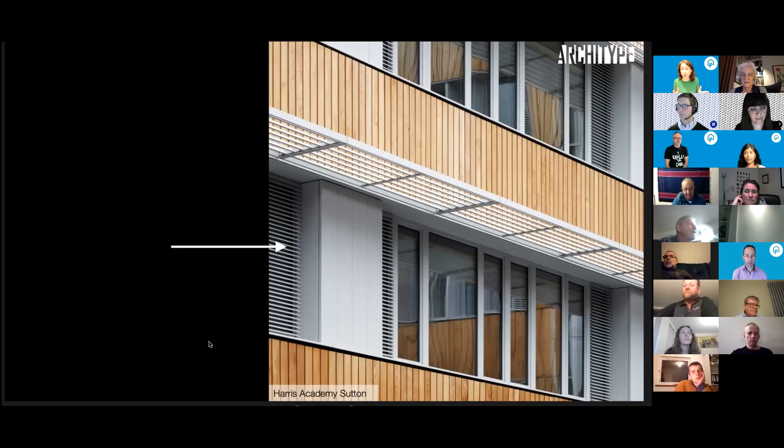It's useful to leave those windows open at night when the temperatures are cooler outside to help cool the building so there's no overheating. The beauty of Passivhaus is that you get this perfectly functioning, comfortable, healthy building as a baseline, and then the occupant is in control of how they use it.

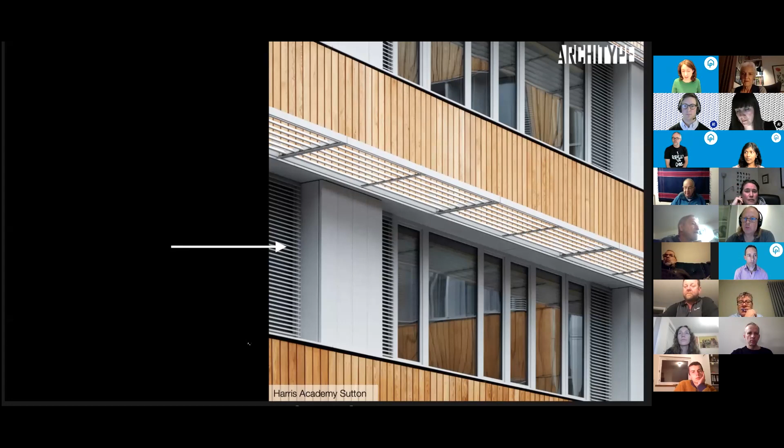Whereas in a standard house, you sometimes might need to open the window to ventilate the bathroom even when it's freezing outside, you've got drafts, you've got high heating bills if you want to stay warm - the building is in control there. Whereas in Passivhaus, the occupant is in control. And that's just what those grills can look like from the inside.

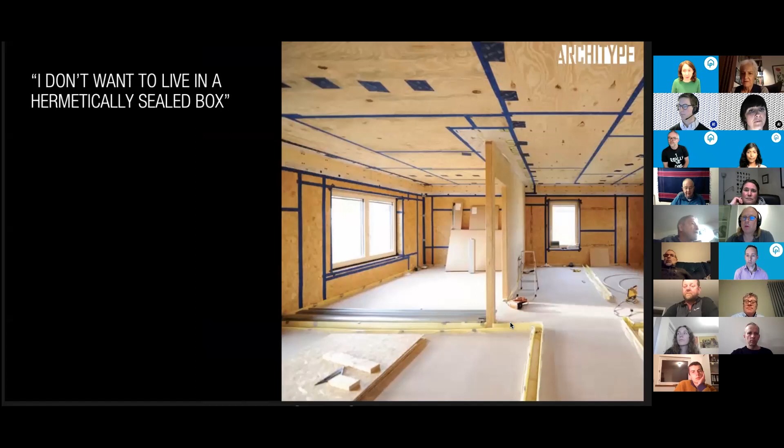Since you can open the windows, Passivhaus buildings obviously are not hermetically sealed boxes. Air does come in and out. We've had no reports of our clients suffocating so far.

However, the fabric of the building does need to be airtight, down to about 0.6 air changes, which is about 10 times lower than current building regs. This is a good thing - it stops all your heat escaping out through holes and leaks in the building, and it stops there being uncomfortable drafts inside. That airtightness figure is tested with all the windows, doors, vent system shut.

But then when people occupy the building, you get fresh air through the vent system, as well as having windows and doors open. Just to flag up, airtightness is not the same as breathability or vapor permeability.

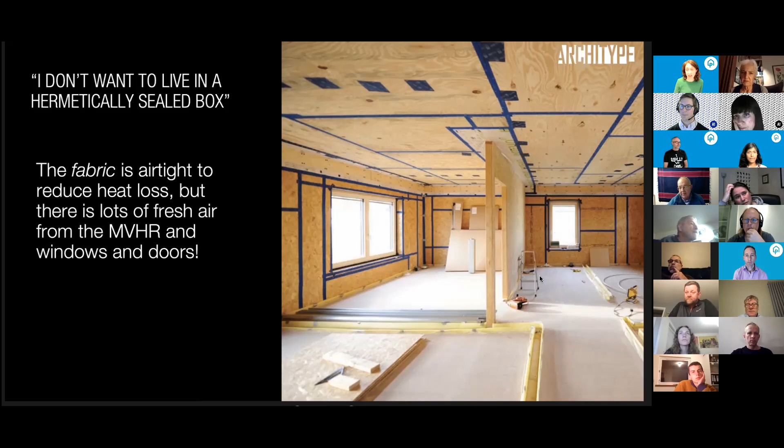And you can build a Passivhaus out of anything that you want. At Architype, we prefer to design airtight buildings that are also breathable and use natural materials. We tend to use OSB on large projects as the airtightness layer - quite cost effective, no wet trades, and it's proven to work. But you can also use a render parge coat if you wanted to go a bit more natural.

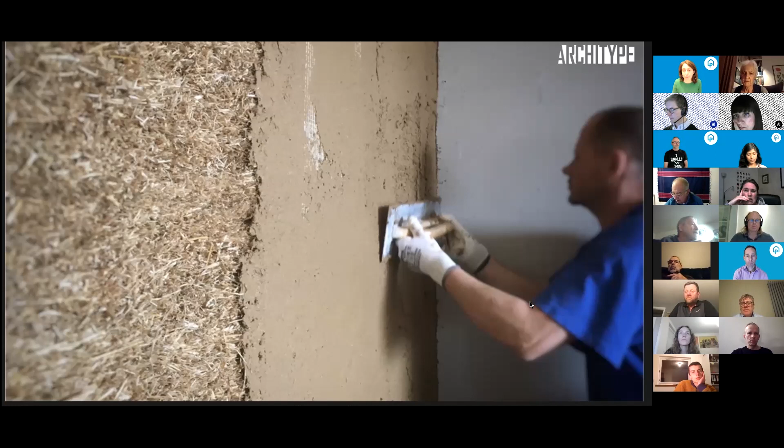Windows again - the type of windows that you need for a Passivhaus are well insulated frames, triple glazed, with high performance spacer bars and a really high airtightness class. This generally means that they're of a higher quality and much less likely to fail than your standard alternative windows. The installation quality is also a lot better in a Passivhaus, as it's actually tested by the air test result, which forces installers to do it correctly.

The windows are also protected by a deep window reveal most of the time, which is used for shading, meaning less weather exposure to those windows. Passivhaus being a comfort standard as much as an energy standard, from these windows you're getting comfortable, even temperatures everywhere in the building - not that really cold feeling when you're sat by the window and can feel it radiating. There's no mold or condensation on your window frames.

So moving on to MVHR. It does work, and we wouldn't use it if it didn't. Of course, it is still a bit of machinery, so it can't be 100% reliable, but no one says boilers don't work or cars don't work, because they very occasionally fail when not maintained properly.

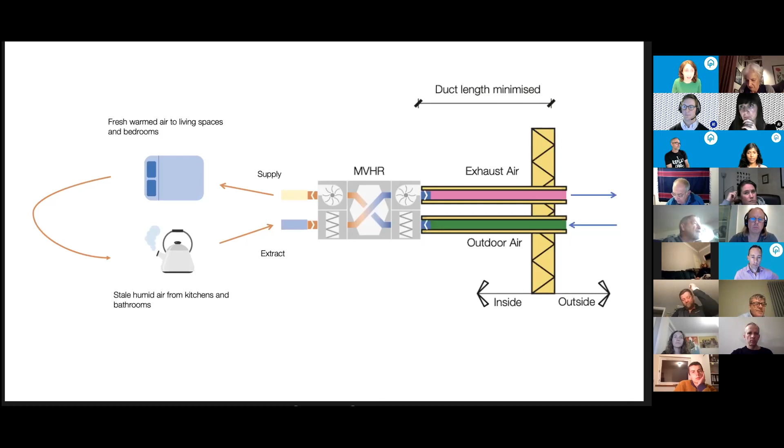Natural ventilation does sound lovely, but if you call it random, uncontrolled ventilation that's cold, it doesn't sound so great. And mechanical ventilation is actually a constant supply of pre-warmed fresh air, which sounds lovely, and it is. Very quickly - there's no recirculation, it's always fresh air. You shouldn't get dry air if the system's designed correctly. The unit should be actually quieter than a household fridge.

MVHR shouldn't generally fail if designed and commissioned correctly. Most of the reports I've had of problems with MVHR are from buildings not using passive house principles, not using high quality units, with commissioning that isn't picked up by a certifier as it is with actual passive house.

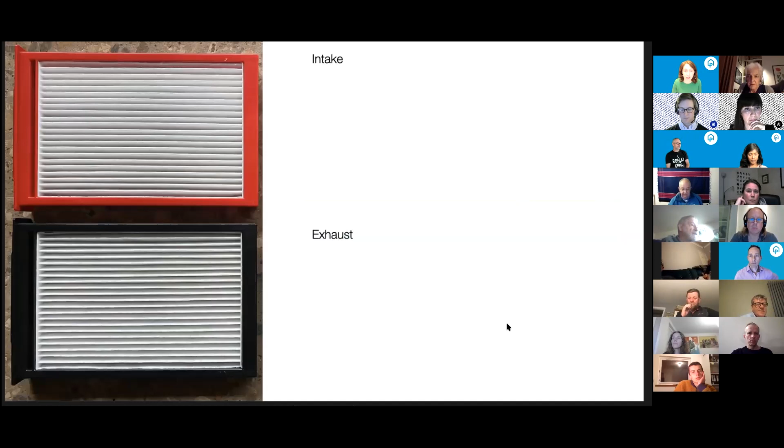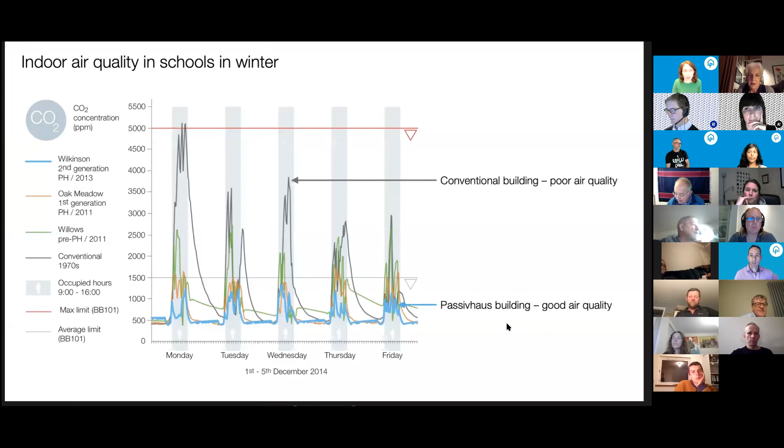It's really quite a body of work that Architype has built up over the last few years.

Our next speaker is John Palmer, whom many of you will have heard. He joined the Passivhaus Trust about 3 years ago as Research and Policy Director. He's a passionate and clear advocate of Passive House, a certified Passive House consultant, a SAP assessor, systems engineer, and experienced project manager. Prior to entering the construction sector, he spent 16 years as an engineering officer in the Royal Navy. John, over to you.

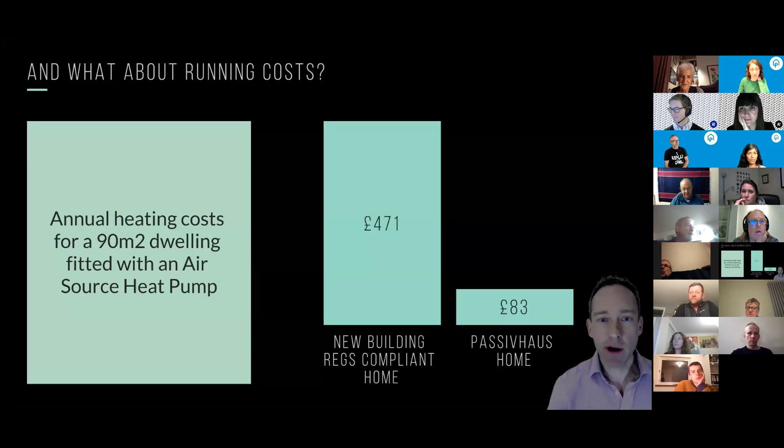This is a great slide, and it's not just about your build costs. Once you've built it, you've got lower running costs as well. So this is your heating costs for a 90 square metre dwelling with an air source heat pump: £470 for a building regs compliant version, £83 for your Passive House. That sounds quite attractive.

Finally, it's important to look at the cost of not doing it, and what we might have to do in the future. We know we're going to have to significantly improve the efficiency of our buildings before we get to 2050, so if we don't do it now, we're going to have to retrofit.

Next myth: it's only about the energy. Well, no, it's about a number of things. The first is comfort. Having been a passive house consultant for a while, people come to you wanting to talk about the energy. When they move in, they don't want to talk about the energy anymore - they want to talk about the comfort, what it's like to live in that building, the atmosphere, everything that goes with that. They forget about the energy and their bills - it's the experience of living in a passive house. It's also about health.

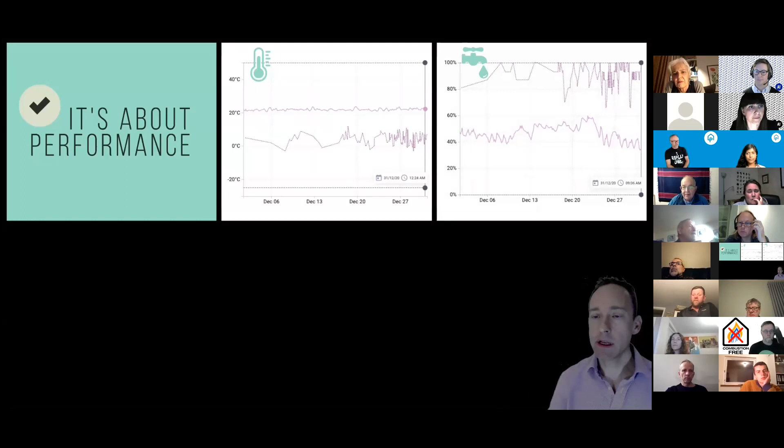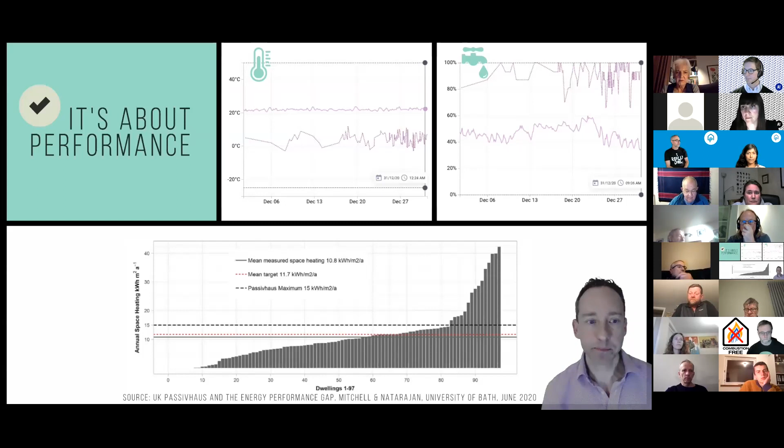Finally, the myth that it's not for retrofit. Let's go back to my criteria - what was comfort and health related, and what was energy related - and I'd like you to drop out any you don't want in your retrofitted house. Well, I can already tell you it's none of them. Everybody wants those comfort factors back in their house for retrofit as much as for new build. All those criteria still apply for a passive house retrofit as they do for a new build.

That's what you get in a retrofit as well. And the best way, I think, to dispel the myth that you can't do retrofits, is to give some examples of existing buildings. So we can't do old buildings with heritage features, can we? Well, here's one where we can.

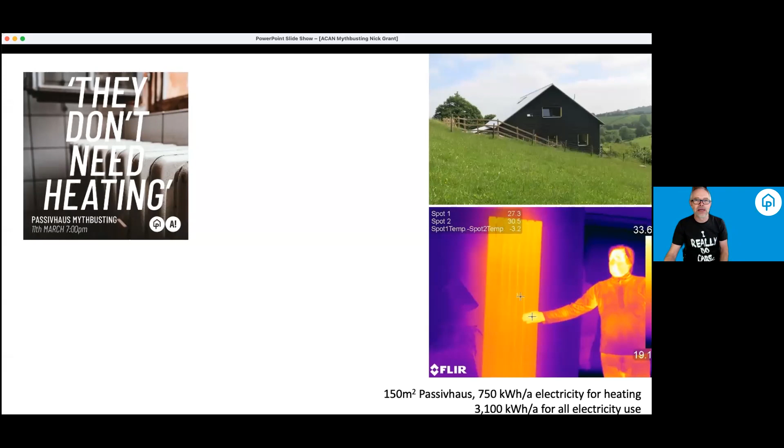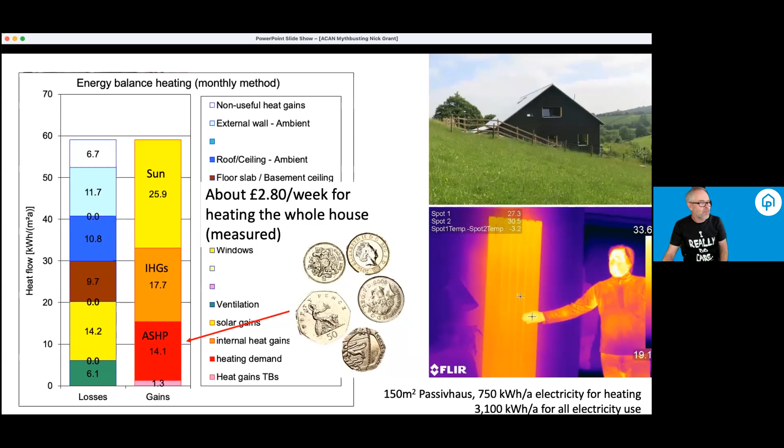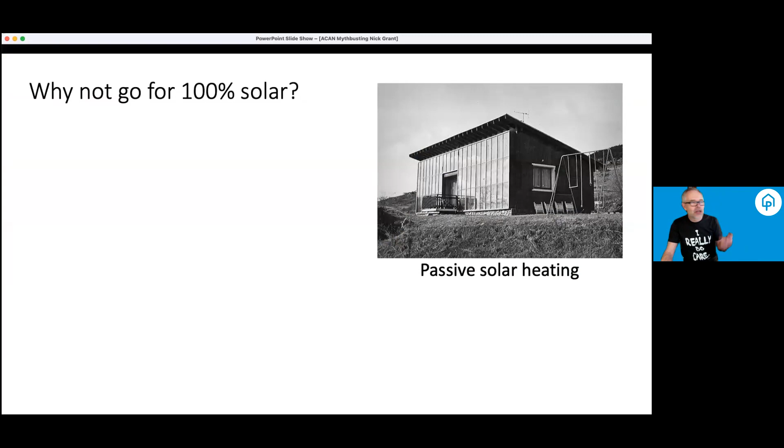So since it's so little, why not go for 100%? Why not go all the way to completely solar, passive solar heating? We tried that - I worked for Centre for Alternative Technology in the 80s, and there were lots of attempts to try and store those last little bits of heat in the winter. The problem is it's a really poor match. In midwinter, when the sun hardly comes above the horizon, there's not very much strength, and you end up finding it's really quite difficult to mop up those bits.

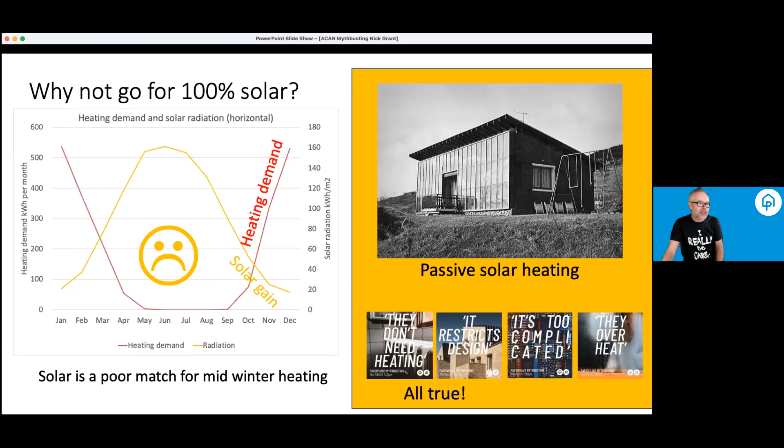So if I was talking about passive solar, all my 4 myths, I'd have to say they all apply to the passive solar house. They do need heating, they do really restrict design, they are complicated, and they do overheat. So you'll hear about some buildings that don't need heating, passive house and non-passive house. We'd say this is actually a bug, not a feature, because as you saw, we're so close to not needing heat. If you imagine internal gains were double, then suddenly the heating doesn't need to come on.

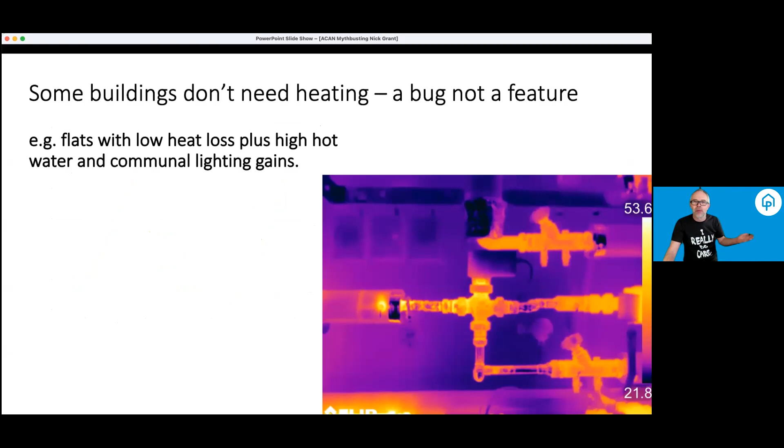But the problem with that is, how do you control that? If the house is already warm, all you can do is open the window, and that would be in winter when you've got cold drafts. And then what about summer? The gains heating it, the hot water losses, the lighting and so on, they'll be providing uncontrolled heat at the time of year when you really don't need it. So that's not a good thing.

And I've seen up in the chat, it's lovely to see, I wasn't even sure if this was worth putting in, this idea that the passive house is boring, it's all the even temperature, it's sort of, yeah, it's life sapping. I've heard all sorts of things said. This idea of your house being too comfortable.

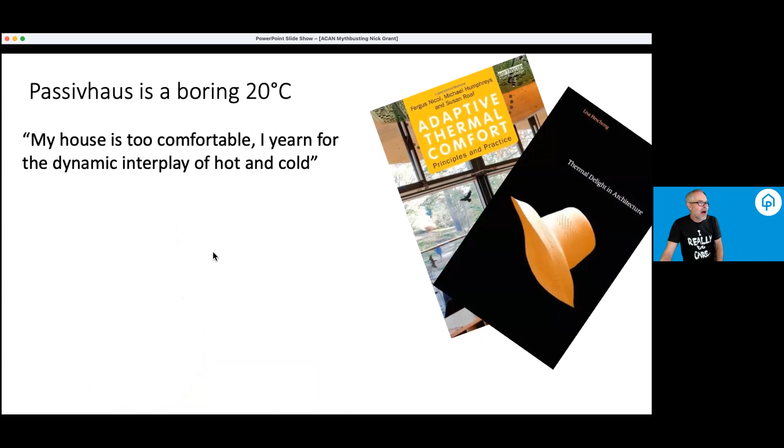In the 80s, with some French philosophy friends spending winters in extreme conditions, experimenting with thermal comfort. It was the 80s, we were young, we were stupid. I can assure you they all live in nice warm houses now.

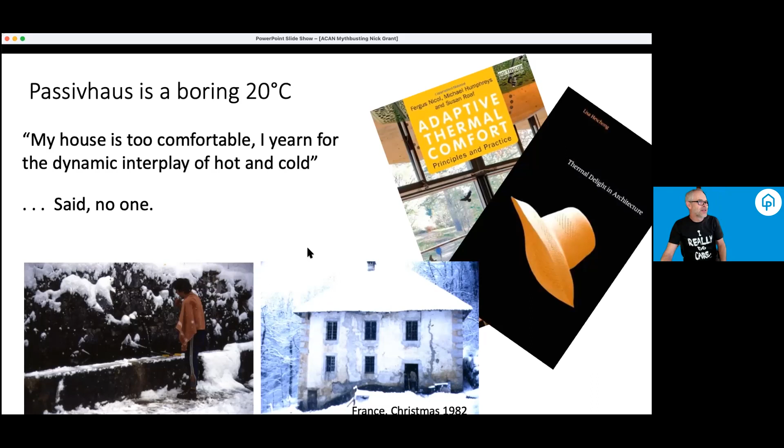And no client has ever said this to us. We've never had anyone complain their house is too comfortable. This is just a complete myth. So I nearly didn't put it in, but I see it's appeared in the chat, so I'm glad I did.

The idea they overheat, actually, yeah, hands up, passive houses can overheat. All buildings can overheat, with or without global warming. And passive house isn't foolproof. You can still get it wrong, but we've got some really powerful design tools with passive house.

We've got the Passivhaus Planning Package, some modeling tools. There's a Passivhaus Trust that provided guidance, spreadsheets to do stress tests and so on. The certification is a check. So we've got lots of tools to do that.

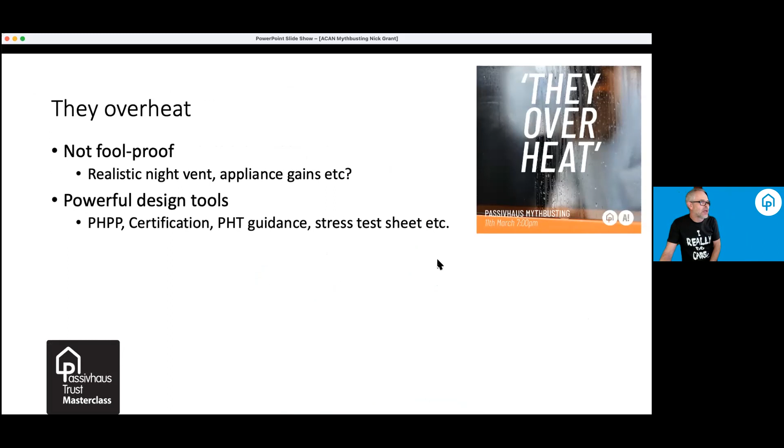And the passive house community are on the case, because this is, it's like a brand, it's not a brand, but we have this identified thing. That's why you're all here tonight, because we've got this idea we can talk about passive house. So if it doesn't work, word gets around and we don't have any more work and no more customers. So it's got to work.

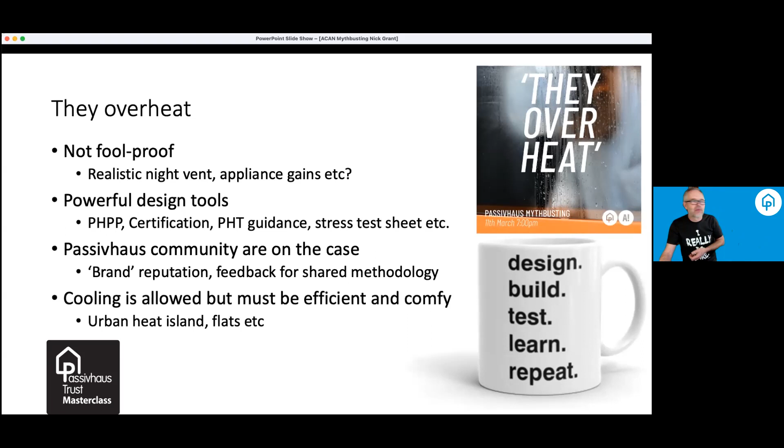And cooling is allowed. You've got to do it efficiently, you've got to do it comfortably. And if you're in an urban heat island, in London, doing flats, say, then I think a small level of comfort cooling would be a really sensible thing to do. And it's perfectly fine. And it restricts design.

So, okay, two options here. I could do the comforting lies. I could show you all sorts of crazy stuff that is all over the place and meets the passive house standard with absolutely no constraints.

But if we're seriously interested in the environment and cost-effective solutions and really dealing with climate change, rather than just delivering passive house to any requirements, then we have to consider a lot of constraints. And some of these are legal constraints, some of them are ethical, some of them are just practical things. And passive house adds a few more.

So we've got a heat limit, a heating demand limit, air tightness target, which frightens off a lot of people at first, but becomes very easy to do. And we've got a lot of comfort and health criteria, which have already been mentioned. So we've got some more constraints. I think constraints are really useful tools.

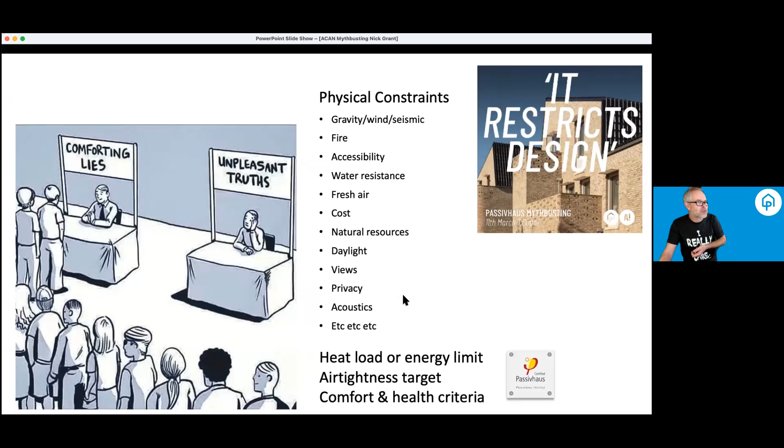Now, a deeper constraint, which actually I'm going to say is a myth, is this idea that a passive house has to face south. We sort of teach this on the training course. Ideally, you face south, then we can do nice, simple shading for summer comfort control. But this example is south facing. It's certified passive house. It's super comfortable. It's great, but not all sites have the luxury of this.

Here's a project we had a couple of years ago. It's now been occupied for a couple of years. West facing plot, lovely client, walking distance to the town in Bishop's Castle, but it's on a service plot with houses to the north and south. So we've stuck with this very unideal west facing plot, and we sort of gritted our teeth and bore it. And it turned out to be really good.

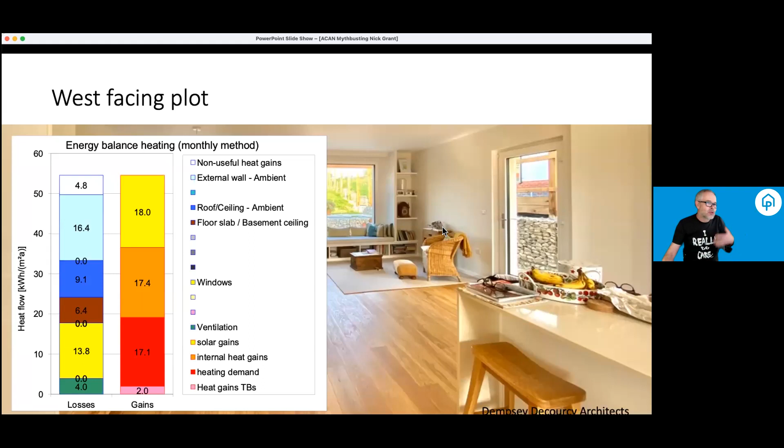We're trying to hit 15, which is a bit tricky with this orientation. We could crank up the insulation, but that makes it expensive. We could get more solar gain, but then we get a summer comfort problem. So we designed an alternative target based on the peak heat load.

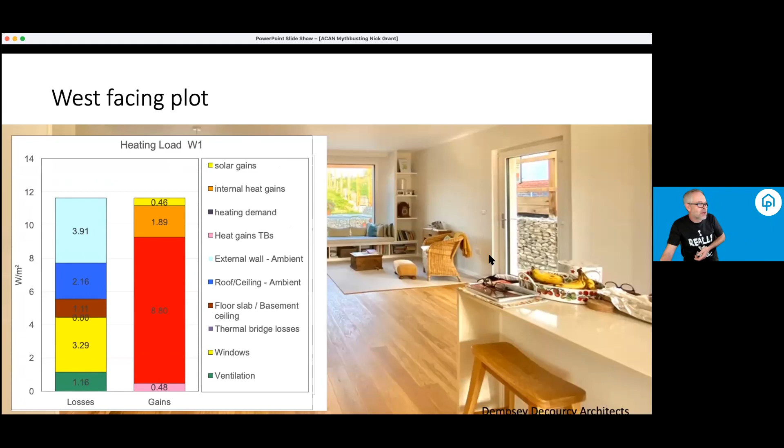It's a bit geeky - some of you will know this stuff, but if not, you've got some joys to come when you get into passive house. Out of that came a bit more design effort to get the daylighting to work without overheating. But it turned out really lovely, and the client loves that they get the morning sun and the evening sun - super comfortable, and magically the same heating demand as the first example.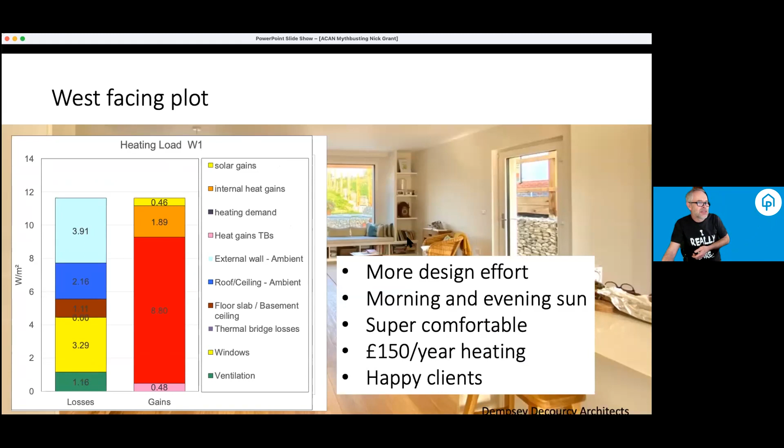These are much bigger than the example John gave us - 150, 170 square metres. So it's a decent sized house, under £3 a week to heat it to a lovely, comfortable temperature.

And then finally, it's too complicated - so yeah, compared to what? Ben Law's house, really lovely building, Grand Designs favourite, it's heated with logs from the wood, built with trees from the wood, and insulated with straw from the fields. Our own house, similarly done, maybe not as beautiful, but Welsh timber and straw, wood stove for heating, windows for ventilation. We were seduced by that idea.

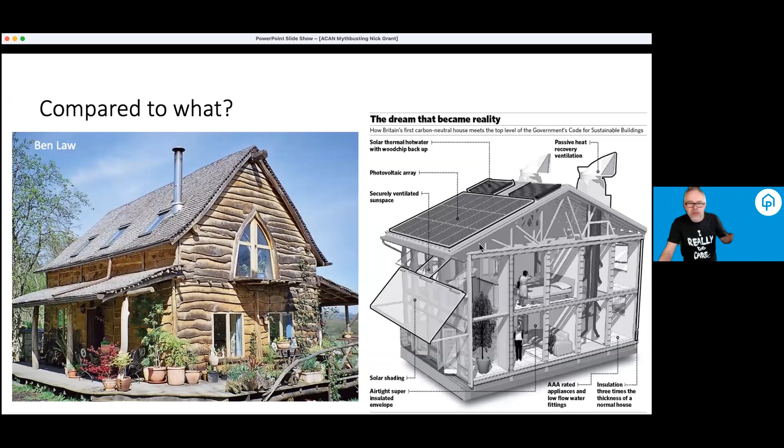Some of the alternatives to passive house that claim to be simpler actually end up much more complicated. They try and get rid of the MVHR and use heat recovery on stack ventilation. They create buffer zones, active solar, all sorts of stuff - if you Google alternatives to passive house, I think all the examples are more complicated, more difficult. If you find a simpler way of achieving the same quality, let us know, we'll bite your arm off. As Einstein said, things have got to be as simple as possible, but no simpler.

So our house, we had windows for opening. It turned out to be quite complicated to manage, so we retrofitted heat recovery ventilation after 20 years, and we're really, really pleased to have done that. And there's still room for simplification.

We've got some rules of thumb - Passivhaus Trust have provided some guidance. There's a friend in Vancouver, Monte Paulsen, some of you may know, who's done a series of workshops on pattern language for Passivhaus, identifying cost-effective solutions. And designing for the peak heat load I mentioned - which will mean nothing to you until you get into Passivhaus - but the heads up, that's a useful simplification.

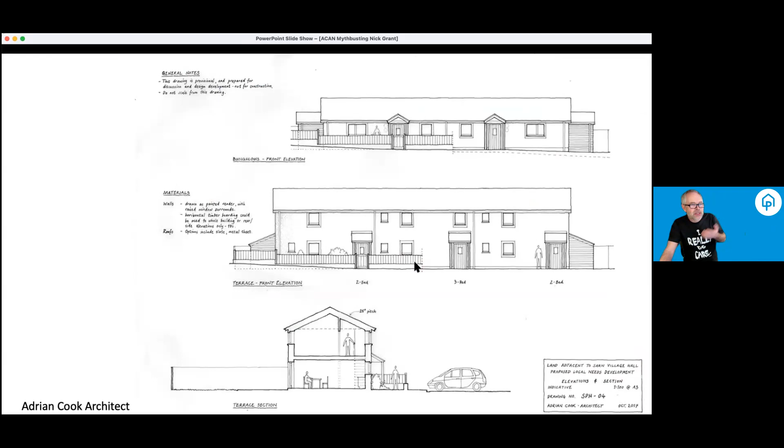Just a few random examples of projects I've worked on, showing a range of projects that have embraced the constraints. There's some rural social housing - a lot of my projects are rural. This is George's house, already mentioned, and he's with us watching tonight.

Lancaster co-housing, early project. St Loy's, nearing completion in Exeter with Architype. The one shown earlier, Hopeview House - something that's not certified but it's certifiable. Another, not our typical passive house, with some challenges, but it meets the standard. More low-cost rural housing, typically around £1,000 a square metre - we're delivering this sort of thing to lock-up, without bathrooms and so on.

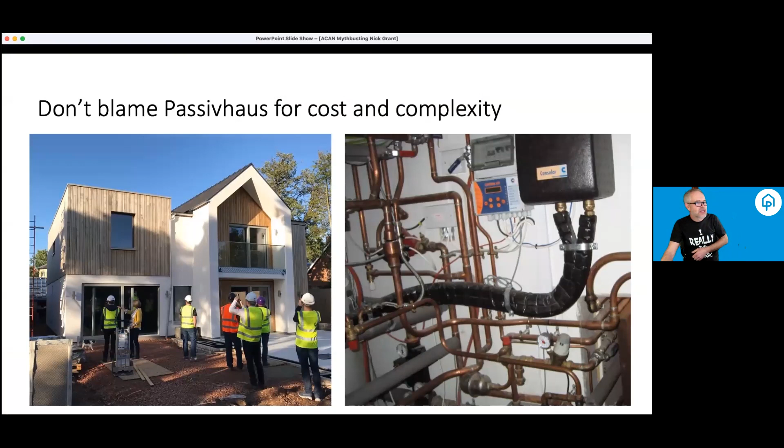And if it is too complicated, don't blame Passivhaus - it's down to the architecture, it's down to the building services. There's no reason that Passivhaus has to be complicated. But when we hear challenges about it being too complicated, it's usually not Passivhaus itself. So those two key ones are kind of a challenge for you to take away and deal with, really.

Try and make stuff simple, embrace the constraints and try and make it simpler. Thanks, I talked a bit quick - I think that's it in the time. I'll just leave you with that quote to digest, which is, for me, the key to design. Thanks for your time.